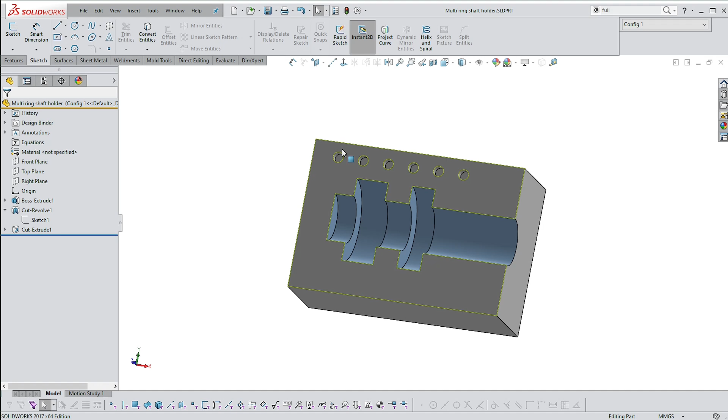Hi everyone, so this is the second part in this series on dimensioning, and I'm going to choose the holder as my dimensioning object. I've put in a series of 10 millimeter deep holes on the top just to confirm something I did in class. So we're going to go across to File and make a drawing from this part, and I'm going to select A2, and we'll see if it's large enough.

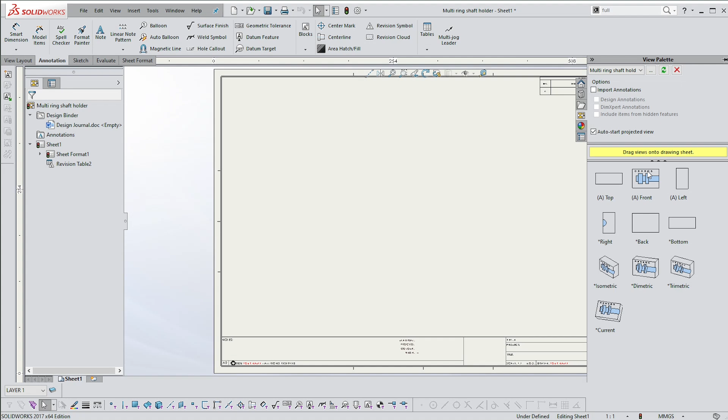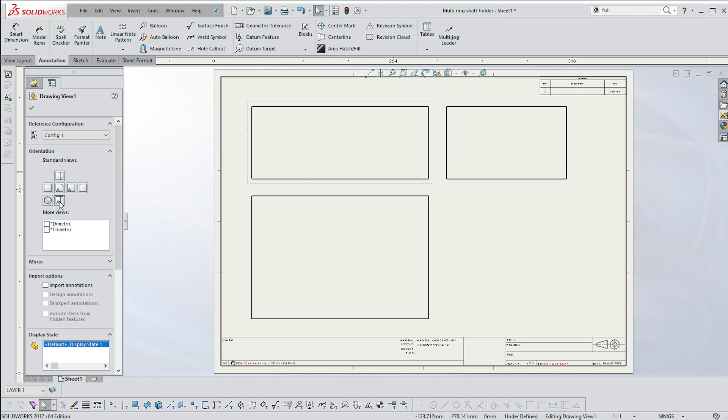Here are my views, and it says the front view is this one, which is not correct - that's actually the top view, so I should have oriented my drawing on the top plane, not the front. Let's take the top view across and drag it down. That's the front view even though it's called the top view, and that's the right view. This isn't showing anything because these views are still not oriented correctly, so I'll select this primary view since everything else depends on it. You can see it's got the top, but it's actually swapped around - it should be bottom. Now we'll get a proper top view in the top view orientation.

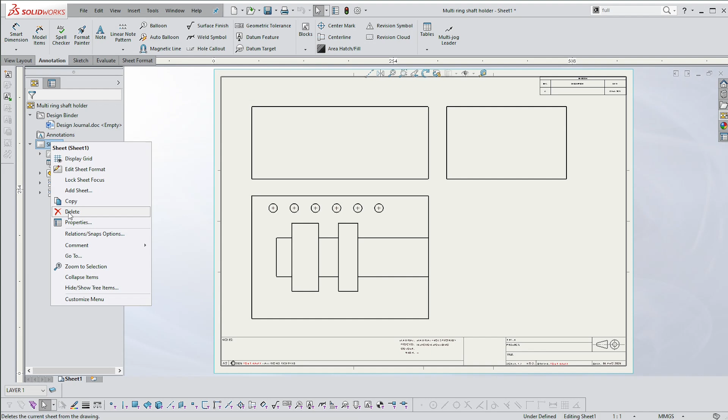Currently these are way too big for this drawing, so let's change the size. Go across to your properties manager and right click in this top sheet, and you'll get to properties. If you've got all your templates loaded, you should be able to select a different size. I want the A1, apply changes, and there we go.

It's updated everything. So I've got a revision block here which I don't want - I can either drag it out of the way, or I can delete it.

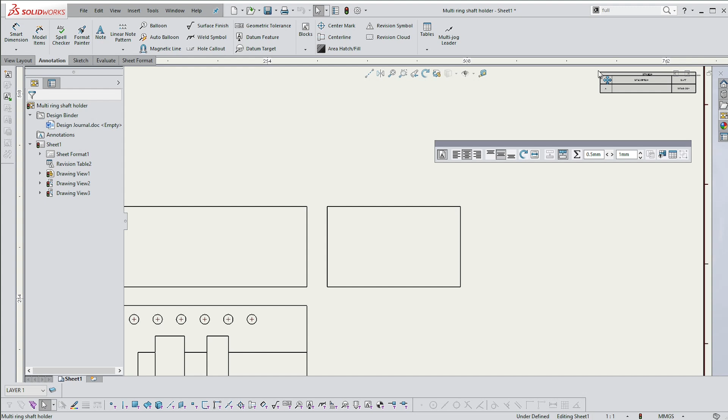Let's space these out nicely so that we've got lots of space around them to dimension, because we can, of course, put in an isometric view as well.

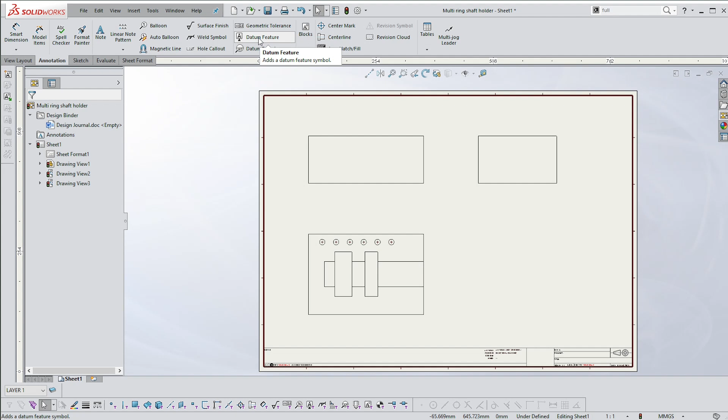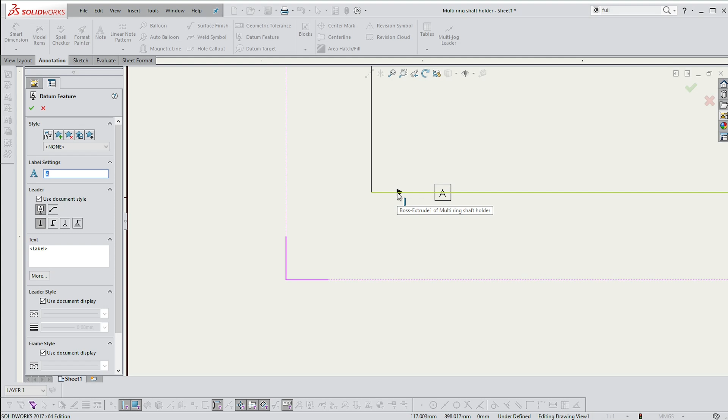So first things first, we want some datums. Let me show you - you're going to be on the view layout, and if you go across one tab, you'll get annotations. Then you've got three commands in a row; the second one is the one we're going to use. Don't worry about tolerancing or the target - we're going to use datum feature. This will give you a little triangle with a leader leading to a text box. Now if I place this as it is, that would indicate a point, but I want to select the line. So select the line - that should put the datum perpendicular to the line.

Then make sure you drag it out. Please don't put your datum inside the drawing or inside its confines - make sure the datum feature box is outside of the confines.

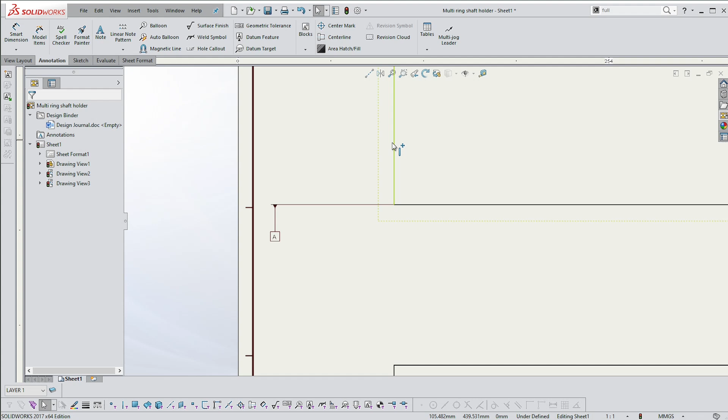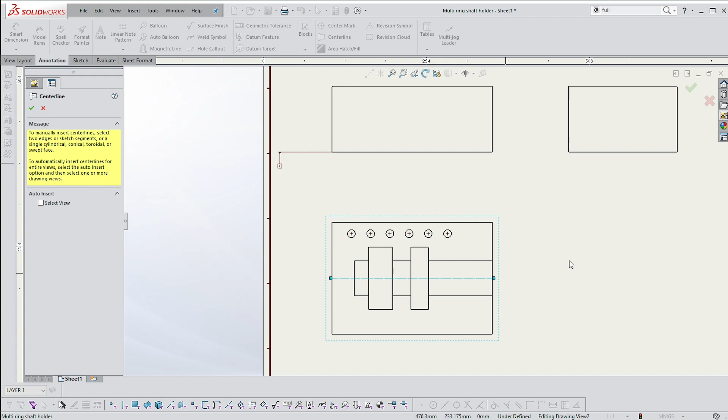So let's do that again, but this time I want my center line to be a datum, so we're going to use the center line command. If your item isn't fully centered, you'd have to select features 1 and 2, and then it'll place a center line in for you - actually, that's a pretty good way to go. This center line is fixed to this view, so I can drag it out, which means if I drag this view, the center line stays centered.

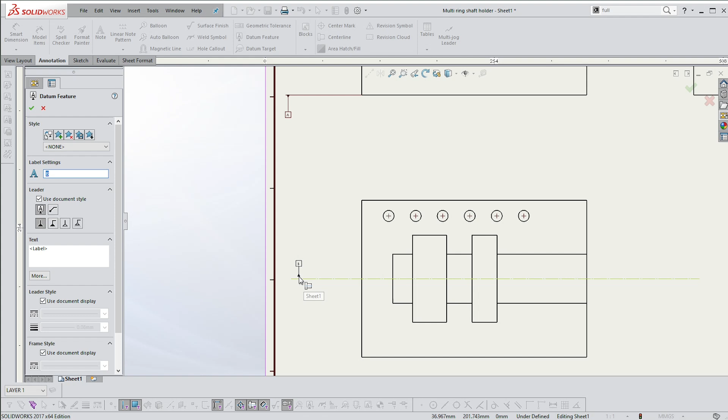That line will be our second datum, and I'm going to get that to lie perpendicular to that line and then outside of it, and then this will be our third datum. So I'll click on the line and make sure my datum feature is perpendicular to the line it's indicating, and then drag it out of the way.

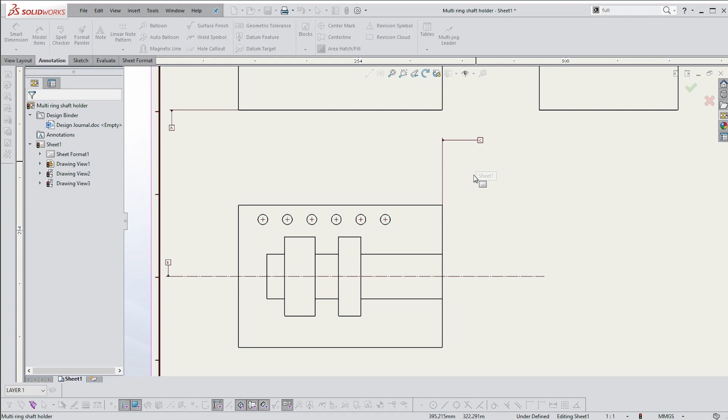Now we need some position dimensions. Remember, it's always position first and size second. So it's tempting to just dimension this and say I've got a dimension, but you have nothing until you have position dimensions.

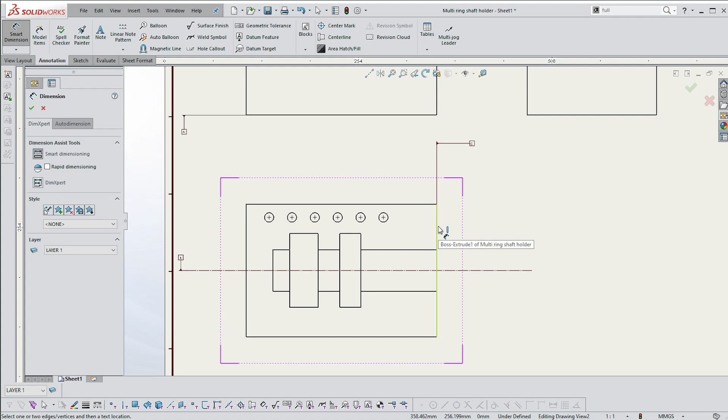So we're going to go to our dimension command, select this line, because that represents that datum plane, and then just click on that line. You have to be a little bit careful here, because if you select the wrong arm of this center mark, you will get an angle instead of a horizontal or vertical dimension.

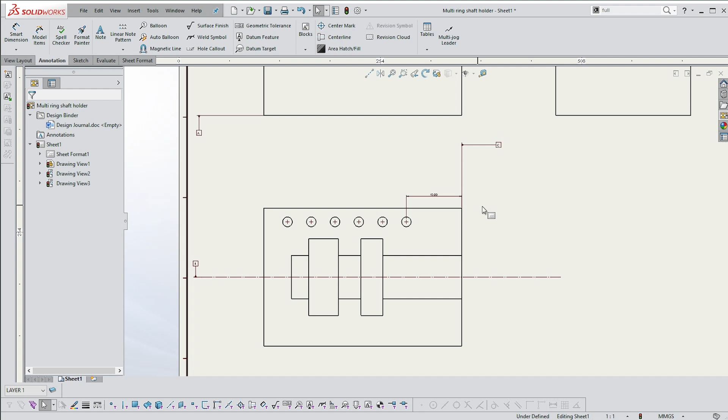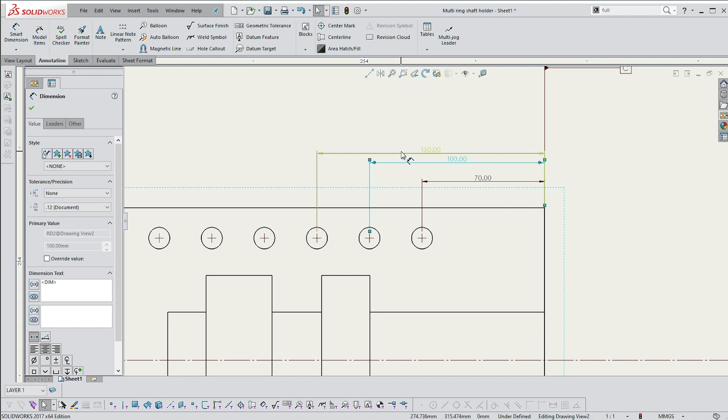If these holes were not evenly spaced, this is the way I would carry on dimensioning. I would go back to that line and go like that, and repeat the process. These, however, are not correct because those features are evenly spaced.

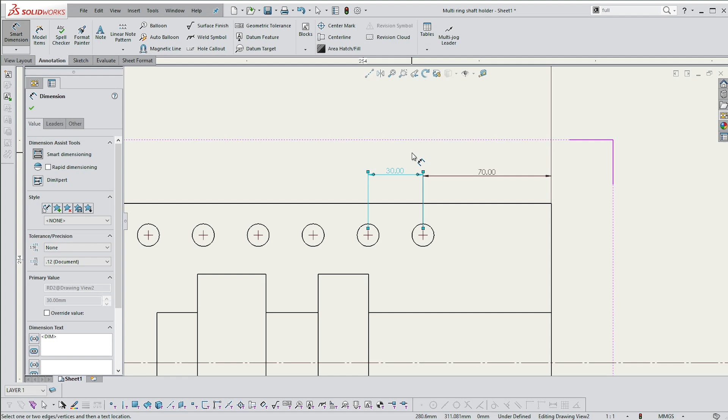So we're going to use something called a pitch. Once you've got the position of the first circle, you go from the first circle's center to the second circle's center. You get a dimension. Then if you hover and click on this again, you'll get this little box which pops out, and then you type in pitch on the right or left hand side. I can't remember which is correct, so I won't penalize you if you put it on either side, as long as I see the word pitch.

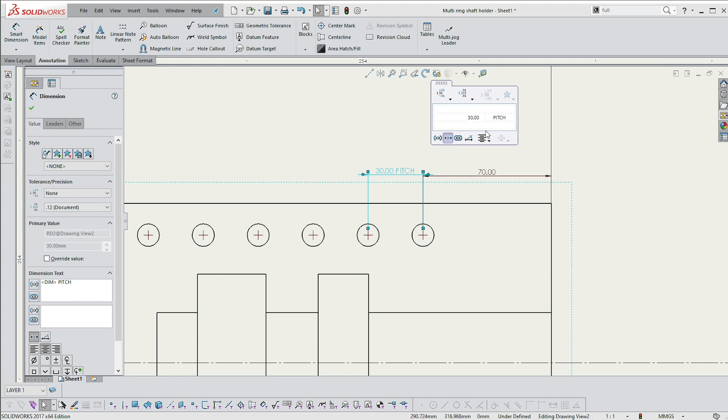What that covers is all of the rest of these, so we're almost done dimensioning this feature. We've got... oh no, we haven't. We need another position dimension. We need to go from that datum to that point there. There we go. And then now we can put in the size dimension.

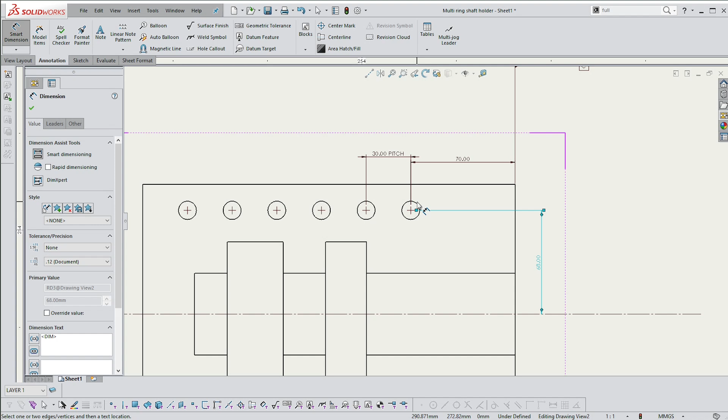So I could choose either of these. You should actually choose the one that you've given all of the position dimensions to. I mean, you could choose that one, it'd still work. And then again, we're going to say how many there are. So times 6. I think there are 6. 1, 2, 3, 4, 5, 6. Yes, there are. Okay, so that's that feature dimensioned.

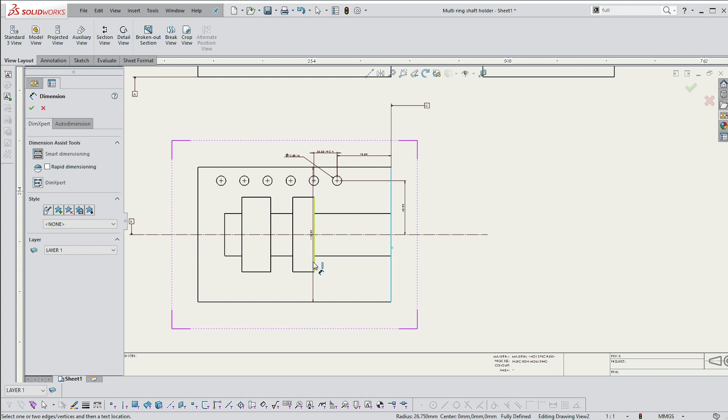So the next thing we need is the position of these. I'm not going to show you how to dimension these diameters for now, or these shaft barrels. All I want you to focus on is getting the position and size dimension. The way I dimensioned this in my sketch is that the positions were these starting edges, and the sizes were the width. So I'm going to go from this line to there to give me one position, and then go back to that one.

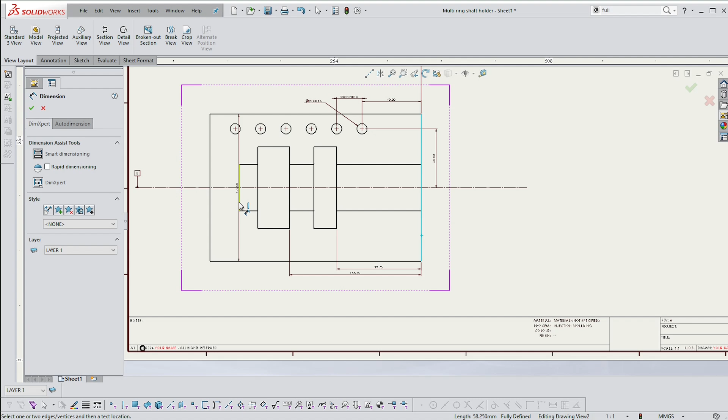I'm going to try something here. I think you might be able to select this and hold. No, you can't. Okay, so you've got to keep going back. So those are my 3 position dimensions, and then the size dimension would be these ones here. This depends very much on what your design intent is and how you wish the two parts to fit together. But from the way I've designed this, this is really the way it should work. So that's size dimension, then position dimension, then size dimension.

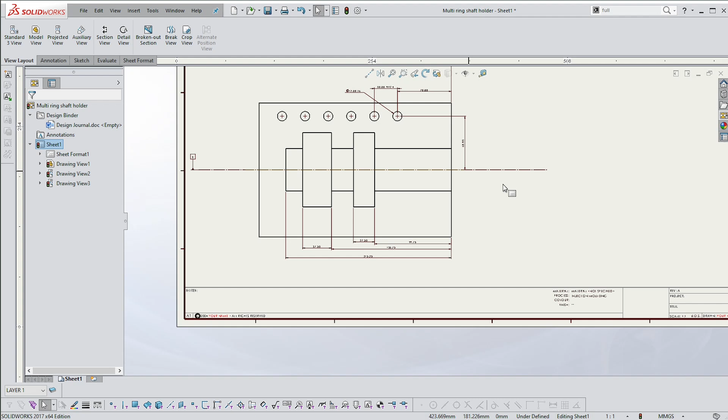Okay, and I think we're almost done. Yeah, I think I'm going to leave it there for now. The only other thing to reiterate is that please don't make your dimensions sit next to each other or on top of each other. Everything should be clear, easy to read. Smaller dimensions should go to the inside and larger dimensions to the outside. So that sort of thing would not be correct.

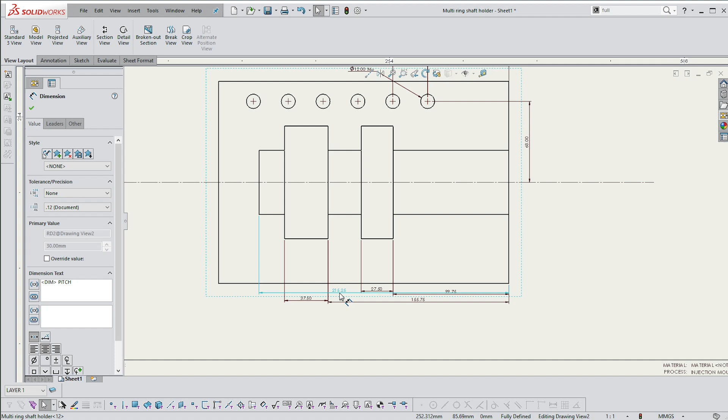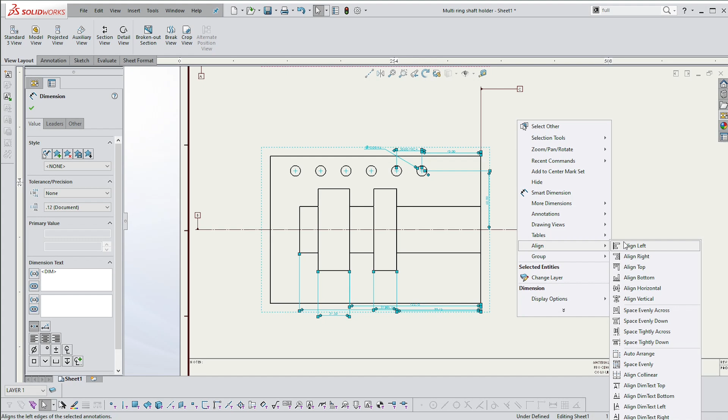If you do, however, make some sort of mess, or you're in a hurry and you've pulled them out and you haven't had time to arrange them and you want to get on with things, SolidWorks very kindly gives you this ability to select all of your dimensions, right-click, go to Align, and select this one here, auto-arrange, and it'll put those dimensions in exactly the right spot with the right spacing automatically. So you see all the dimensions are outside the confines of the actual drawing view. They all have the same spacing. They're optimally arranged. This one might do with something like that.